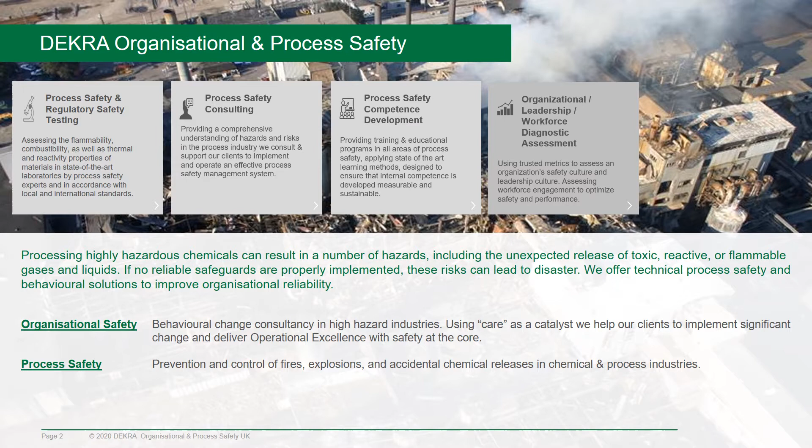In our work, we do a lot of process safety and regulatory safety testing, process safety consulting across a whole range of topics that make up process safety. We offer competence development training schemes for our clients to help educate and upskill in all the areas of process safety. And we do organisational leadership and workforce diagnostic assessments to look at the culture of organisations, their leaderships and their engagement of their workforce to help them plan a strategy to improve reliability in the human domain.

Finally, we do psychological and cognitive consultancy, drawing on insights from neuroscience. We use a brain-centric tool to help us reduce risk.

So in the course of the presentation, we'll talk about process safety information, the background to the process. Then we'll look at the process safety risks, but we'll focus on the runaway reaction risk. And within assessing runaway reactions, we'll look at systematic assessment procedures, what they should look like and why you should have one. Then specific to the case study, we'll look at thermodynamics and thermal stability, how we identify and assess potentially hazardous scenarios, and then how we rigorously evaluate those scenarios using layers of protection analysis to prove the validity of the safety case. We conclude with some relief system considerations for what is a rather demanding runaway reaction, and then we'll seek to summarise all of these things together.

We'll start out looking at the background to the process.

The process involves the epoxidation of vegetable oil via the Prileschajew reaction, where peroxyformic acid reacts with the unsaturated double bonds in the vegetable oil to form the epoxy group. This is a very long established process and also very widely used.

The process conditions involve mixing oil, solvent and hydrogen peroxide at 65 degrees, adding formic acid in a semi-batch manner over 120 minutes, and as you'll see from the reaction mechanism, the performic acid reacts with a double bond, liberating the epoxy group, but also rejuvenating and regenerating the formic acid. So the process involves the addition of further hydrogen peroxide, reacting out for a further 5 hours, and then quenching the batch. The regulators in the UK challenged the safety of the process after more than 50 years of processing on site.

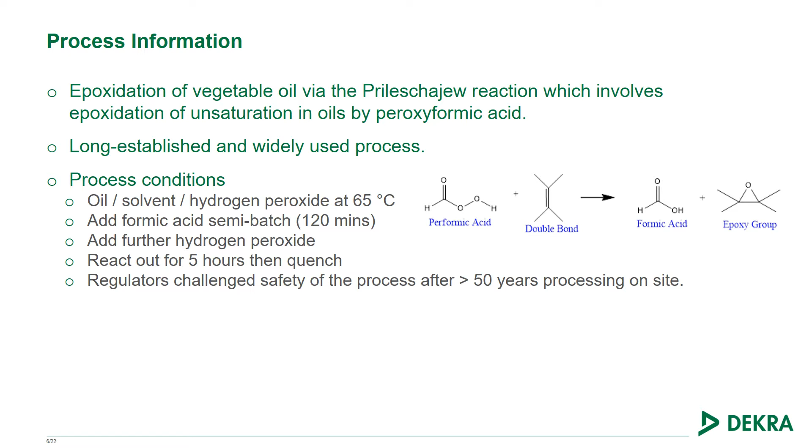There are a number of key learning points through the process. The first one being that a history of incident-free operation over a number of years isn't a guarantee of an incident-free future. In process safety, we're looking at events which are extremely low probability, but can be extremely high consequence. So we should strive for a culture based on a chronic sense of unease.

The second key learning point is that operating companies must be confident that their process safety studies are able to withstand scrutiny, either through the provision of internal competence, using external specialists, or a combination of both. Processes should be regularly reviewed against current standards and best practices to ensure that the safety case is current and up to date.

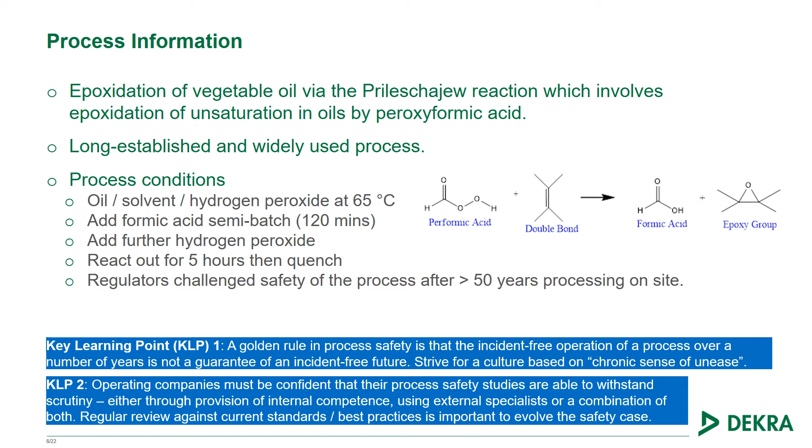Next, we'll look at the process safety risks involved in the process.

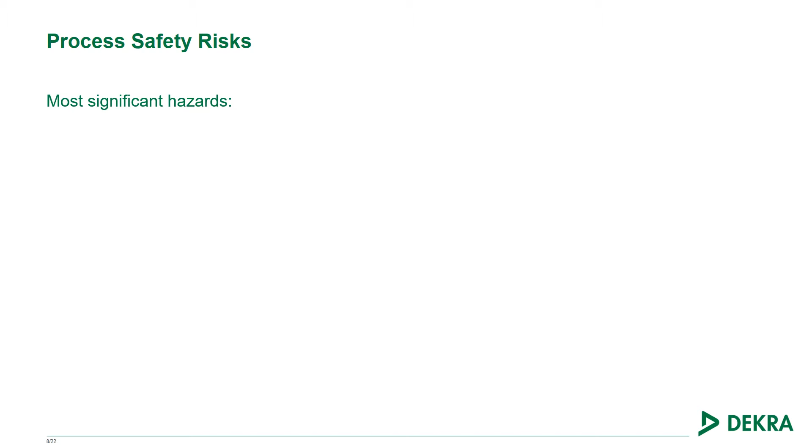So there are a number of significant risks posed in this particular process. The first one, and the one that the operating company in this case had focused on most of their attention over the 50 years, was the potential for detonation.

Hydrogen peroxide, formic acid and water mixtures can be detonable. The triangle diagram in the top right hand of the screen shows the region of instability or detonability of the hydrogen peroxide and formic acid mixtures. The wiggly blue line that's been superimposed demonstrates the process composition throughout the process, which has been specially designed to stay out of the detonable region indicated by the red line and the highly hazardous region indicated by the orange line.

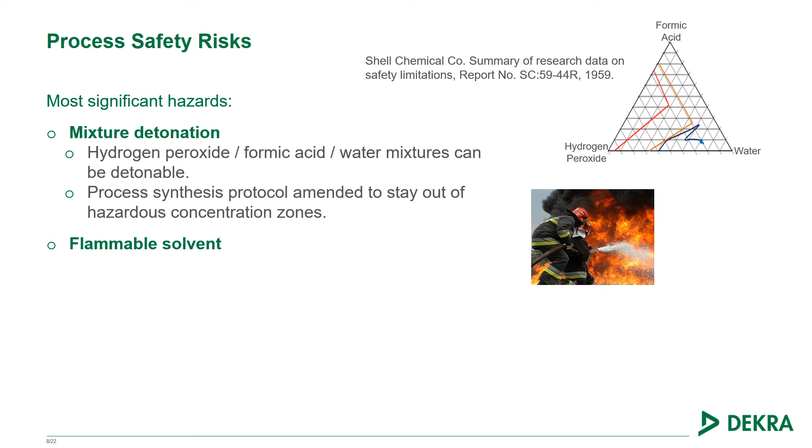There is, of course, always a flammable solvent risk with such operations. And there's also a risk of oil oxidation, sometimes called oily rag syndrome, where finely divided oil, either soaked into lagging or on cloths, can almost spontaneously combust. And vegetable oils are particularly renowned for that type of behaviour.

The final risk, and the thing that we're going to focus our efforts on, is the risk of runaway reaction.

The next key learning point in the case study is that you must have a safe system of work in place to protect against all foreseeable risks. You can't focus on the main risk and ignore the others.

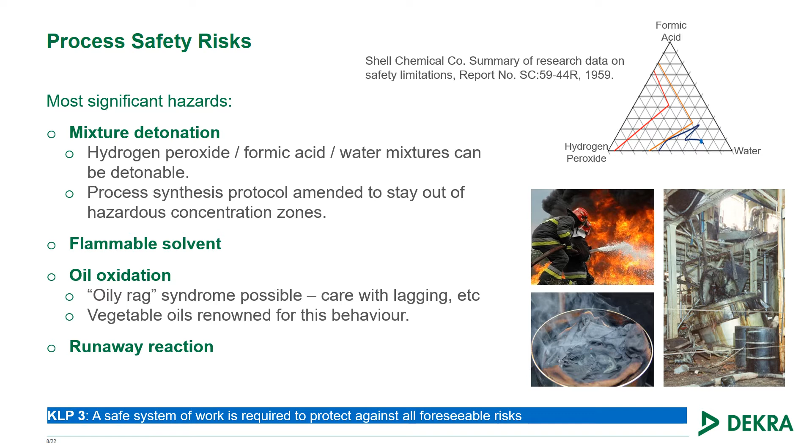So now we'll look deeper at the runaway reaction risks and go through the systematic assessment procedure, look at the kinetics, thermodynamics and thermal stability of the process, look at assessing hazardous scenarios, and then rigorously evaluate those, and then consider the relief system.

So having a systematic assessment procedure ingrained in process development is a really pivotal safeguard against exothermic runaway reactions. And this assessment procedure starts before any synthesis. It starts at the chemical route selection stage, where the selection of the chemical route can be governed to some extent by the process safety risks that the synthesis may involve.

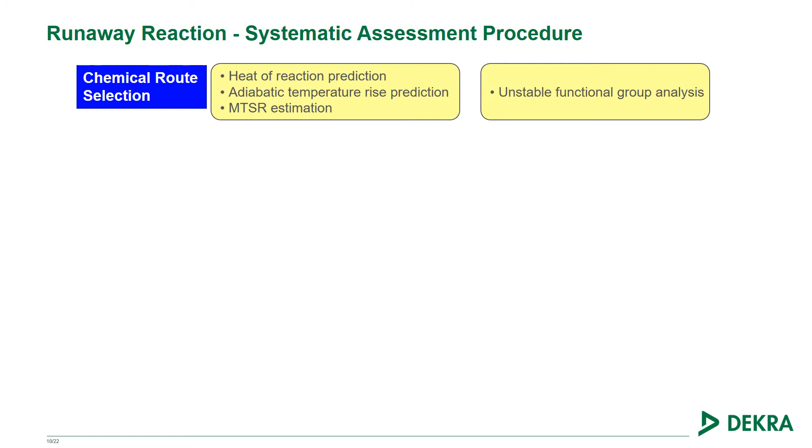At this stage, we'll be looking at things like predicting the heat of reaction, and if we can get that, predicting what the adiabatic temperature rise is, and then predicting what the maximum temperature of the synthesis reaction might be. We'd also look, in terms of thermal stability here, for potentially unstable functional groups.

When we do get into process development and optimization, hopefully of a route that's been selected with a balance of good process safety characteristics, we'll be looking to fully characterize the normal process. That's measure the heat of reaction through calorimetry, quantify any gas generation, and be able to measure and calculate the adiabatic temperature rise.

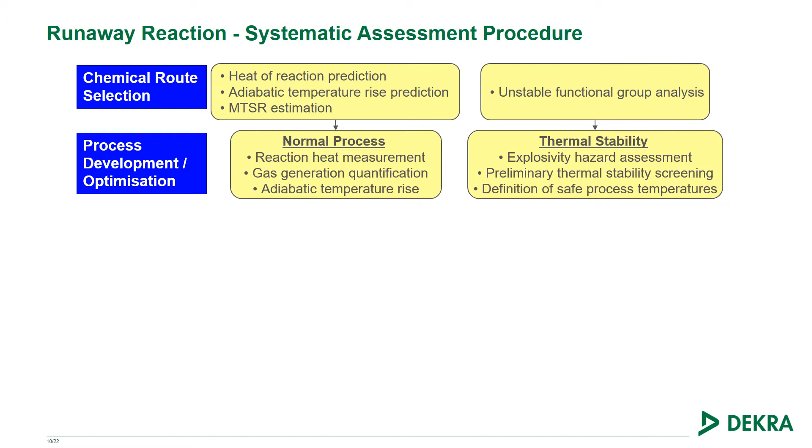In terms of thermal stability, we'll look at explosivity risk assessment if there are very unstable functional groups present, look at preliminary thermal stability screening, and then hopefully be able to do further testing to define maximum safe process temperatures.

Once we get to pilot scale, and then again at production scale, we need a basis of safety to exist. This will involve a process of identifying what hazardous deviations can exist, then simulating those deviations or modeling those deviations to understand the consequence, and then putting in place safety measures to either prevent the hazardous deviation from occurring or to protect against the consequences of that deviation.

This process is shown twice here, once for pilot scale and once for large scale. And that's very intentional because the risks at each scale are different. Pilot scale operations use different plant, different control philosophy, different extent of manual intervention than large scale plant. So it's very important that you do this process twice.

The key learning point here really is that the systematic assessment process should be ingrained in process development and should start before any synthesis begins. For retrospective process assessments, making sure that you fill in any gaps with missing characterization data will optimize the effectiveness of decisions made when considering consequences in the subsequent process hazard analysis.

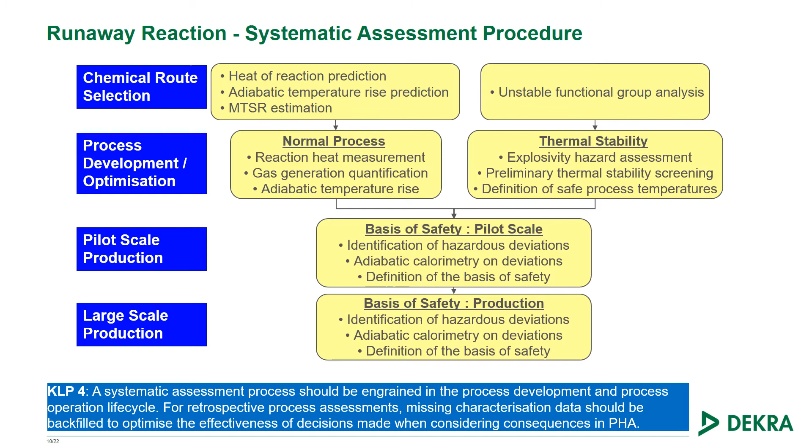In the first stage of reaction hazard assessment here, we're looking to characterize the overall thermochemistry of the process, and there are lots of potential energetic reactions which can occur. The desired epoxidation has a heat of reaction of between -230 and -250 kilojoules per mole.

There's gas generation in the second stage, there is significant accumulation of reactants, and the potential adiabatic temperature rise of the process is 330 Kelvin.

The worst case composition in terms of runaway reaction potential occurs after the second hydrogen peroxide addition, where 51% of the reaction takes place after the peroxide addition is completed.

There are also other energetic reactions possible. The decomposition of hydrogen peroxide has a heat of reaction of -98 kilojoules per mole, and the decomposition of performic acid has a heat of reaction of -352 kilojoules per mole.

The graph on the right-hand side shows the METTLER-TOLEDO RC1E simulation of the normal process, the dark blue line indicating the heat flow, and you can see very clearly two peaks. The first associated with the first stage of reaction during the formic acid addition, and then a second spike after the addition of the second portion of hydrogen peroxide.

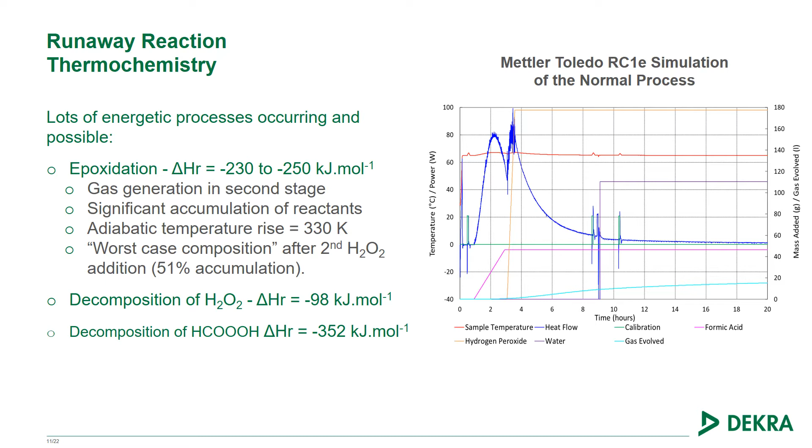It's the accumulation after that second hydrogen peroxide addition that is most interesting for us in terms of runaway reaction potential. The very light blue line at the bottom of the graph demonstrates the gas generation from the process. You'll see from the tail of the heat flow, also corroborated by the gas flow information, that the desired reaction takes 5 to 6 hours to reach a high degree of completion after the second peroxide addition.

The key learning point here is more in terms of chemical engineering. While chemists focus on thermodynamics, engineers tend to focus on kinetics, because it's kinetics which drive vent size. Regulators increasingly seek not just thermodynamic information, but also kinetic information when inspecting multi-product plant, to ensure that worst-case reactions are known. Just comparing heats of reaction provides a basis for hazard analysis, but not for risk assessment.

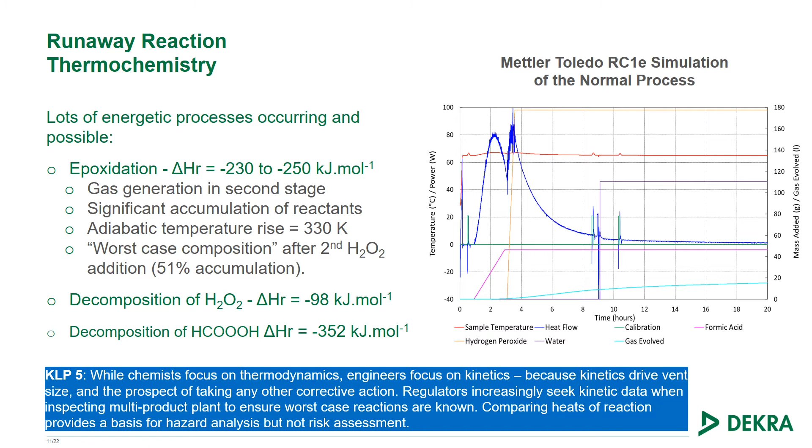The next step of chemical reaction hazard evaluation is to understand the thermal stability of the batch. So you'll see here a thermal stability test using accelerating rate calorimetry, an adiabatic calorimetry technique, and a sample of the batch after full completion of the reaction.

You'll see the classical heat wait search analysis of the ARC technique, indicating nothing occurring up to about 270 degrees, and then a slow initial but accelerating very rapidly exothermic decomposition with considerable pressure generation.

Correcting for phi-factor effects, the TD24, or the temperature from which it takes 24 hours from onset to reach maximum rate, is calculated to be 238 degrees C.

Key learning point here is that isothermal calorimetry measurements only tell us half the thermal story necessary to understand the safety of the process. Understanding the thermal stability is an absolutely essential ingredient in understanding the overall risk.

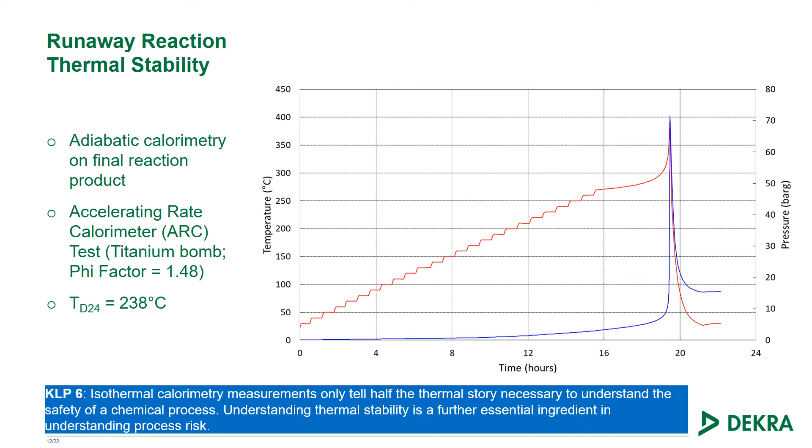Once we've characterized the process in terms of reaction calorimetry and thermochemistry understanding and thermal stability analysis, it's necessary to look at the plant together with the process to identify potentially hazardous scenarios.

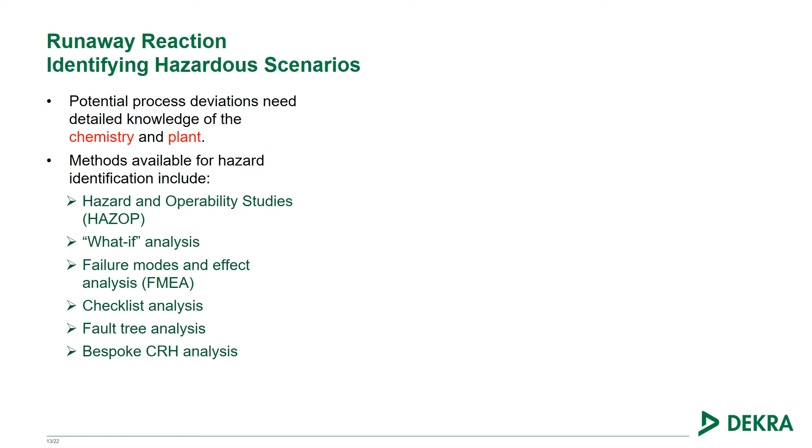There are a number of methods which can be applied to do this hazard analysis. We could use conventional hazard and operability studies, what-if analysis, failure mode and effect analysis, a simple checklist, fault tree analysis, or some other bespoke chemical reaction hazard analysis.

For the process involved in the epoxidation, there were 9 significant deviation scenarios identified. The first one being the least complex, the most foreseeable, which was cooling failure at the end of the second peroxide addition. After that, 8 other scenarios were also identified which could lead to runaway reaction.

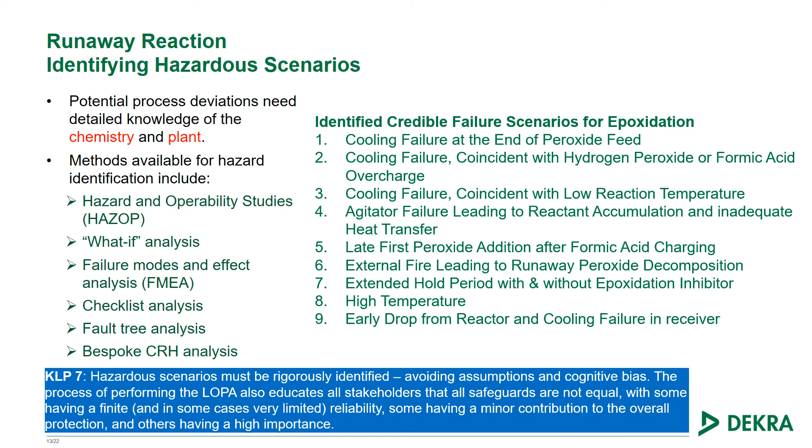These hazardous scenarios have to be identified rigorously, avoiding assumptions and cognitive bias. The process of performing a subsequent layer of protection analysis on each of these potential deviations provides a good basis to educate the stakeholders that all safeguards are not equal, some having a very finite and in some cases very limited reliability, some having a minor contribution to the overall protection, but others having a very high importance.

Having identified potentially hazardous scenarios, it's necessary to simulate and quantify those scenarios. In this case, we've looked at the adiabatic simulation of the loss of cooling scenario at 51% accumulation of peroxide.

This test was conducted using a VSP2 adiabatic calorimeter in a passivated Hastelloy C cell with a phi-factor of 1.1. You can see in a small matter of minutes the reaction progresses, and just over 100 degrees it accelerates extremely rapidly, generating very high pressures, in this case well in excess of 70 bar.

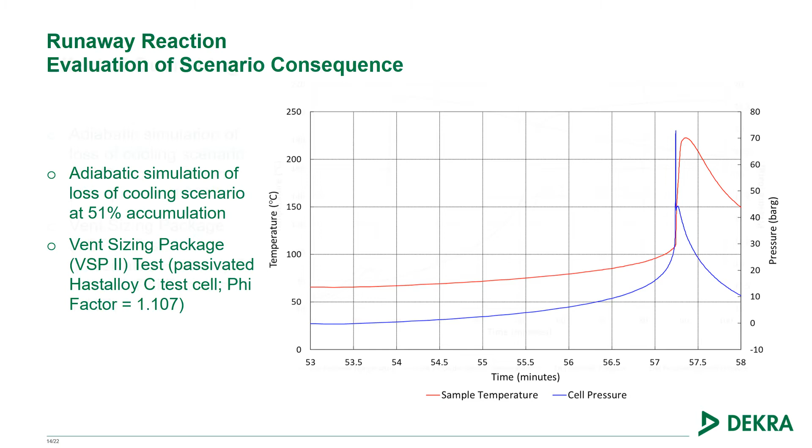One other protection mechanism that existed on the plant was a water quench. In the laboratory, we can use our adiabatic calorimetry techniques to look at the effectiveness of the water quench, and you can see in this graph a side-by-side comparison of the temperature and pressure profiles when the water quench is added.

This is for the 51% accumulation scenario when the temperature reaches 90 degrees. The red lines represent the unquenched reactions, the blue lines represent the quenched reactions, and you can see the downturn at about 90 degrees as the water is injected.

What you will also see is that the water injection does not kill the reaction. The reaction continues. The peak temperature is slightly moderated, the peak pressure is slightly moderated, and the rates are slightly moderated, but a runaway reaction still continues to well above the design pressure of the plant.

The key learning point from this stage of work is that the physical water quench doesn't stop the reaction. The reaction continues, but at a lower rate. So this buys us time and leads to lower peak conditions, but possibly still hazardous. So the summary is: safeguards don't just need to operate, they must be fully effective in removing the hazard.

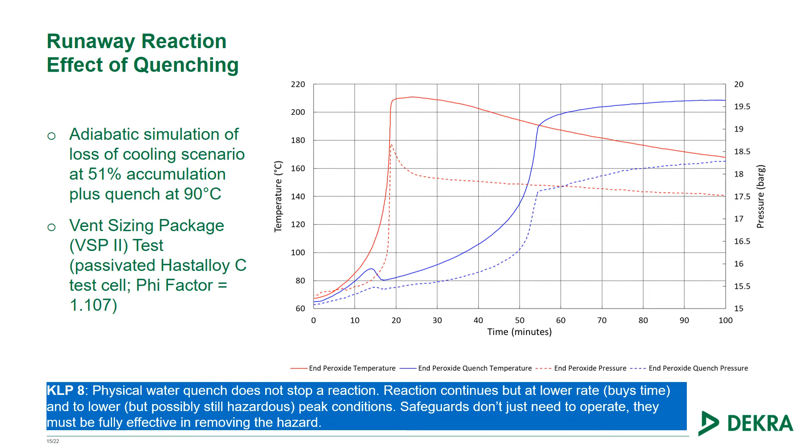Without wishing to dwell on the detail, I wanted to show you an example of what a layer of protection analysis looks like for scenario 1. Scenario 1 is failure of the cooling water supply at a point in the process immediately after the second hydrogen peroxide charge, leading to runaway reaction, overpressurization, vessel rupture, and in all likelihood resulting in the fatality of the 2 operators who supervise the plant. Firstly, we look at the initiating causes and their likelihood.

The potential causes here were cooling pump failure, electrical failure, control failure closing the cooling supply, agitator failure, or cooling water pipe rupture. Overall, the likelihood is about 1 per 4 years that this event would occur.

Then we move on to look at the protection layers in place. Firstly, we have general process design. The process is not in this at-risk state all the time over the course of a year, but for 1750 batches per year with a risk period of 2 hours per batch, we can see that about 40% of the time we are at risk.

We also have a SIL compliant quench system for which we can take credit. We have really good evacuation procedures in the event of an emergency. And if we have an adequately sized relief system, we can take account of a reduction factor of 100 in the likelihood. The conclusion for this study is that the risk is as low as reasonably practicable if the relief system is shown to be effective.

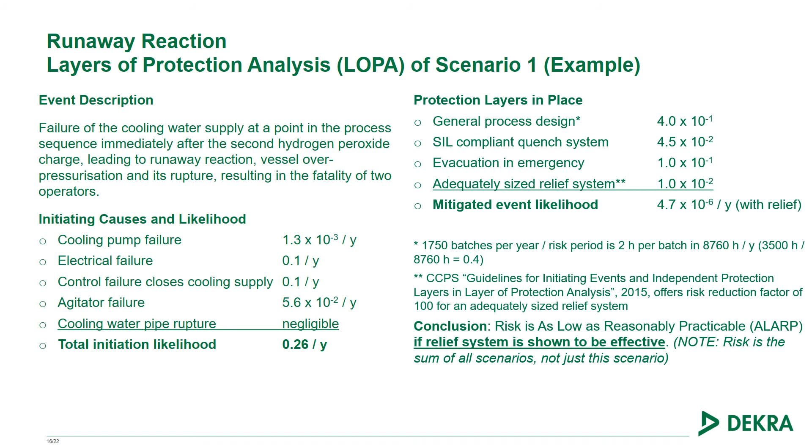The risk is the sum of all the scenarios, not just this scenario. The key learning points here are firstly, that just because a vessel has a vent doesn't mean it's big enough. And secondly, even if you have a vent, you're now only recommended to take a risk reduction factor of 100 if it's adequately sized.

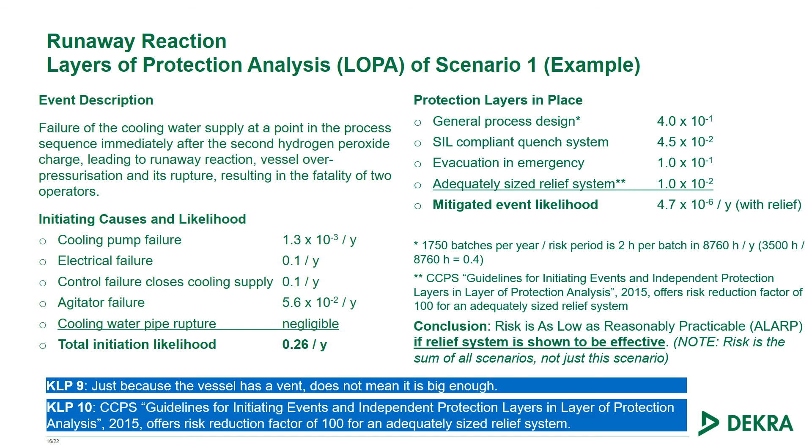Emergency relief systems are very commonly the ultimate basis of safety for many reactors involving exothermic reactions. But there are some considerations that need to be taken into account to make sure that the relief is doing and will do its desired function.

Firstly, the relief system for a runaway reaction has to be based on DIERS methodologies for two-phase discharge. DIERS is the Design Institute for Emergency Relief Systems.

In the current case, the quench is a very necessary layer of protection to meet the tolerability criteria. As we've seen earlier in the case study, the quench does not stop the reaction, but it does slow the reaction down, and slowing the kinetics provides a realistic way of reducing the size of the emergency relief device that's required. But still, having a 0.5 meter diameter vent, the thrust forces seen on the pipework by the two-phase flow are huge, and you must have adequate support and bracing in this pipework to ensure its integrity.

Finally, the discharge normally has to be captured in a suitable separation device, like a dump tank. That also needs adequate design for separation. In the current case, because of the diameter of the pipe, bends in the pipework could not be supported due to the extreme thrust forces, so the pipe had to direct directly and straight into a dump tank.

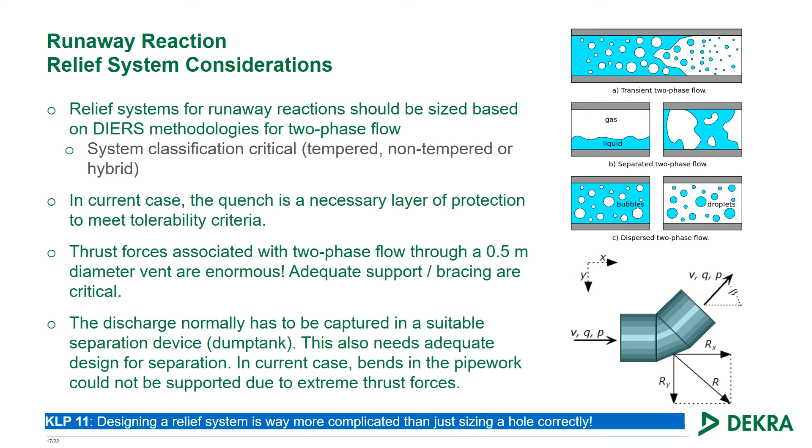Final learning point in the case study, therefore, is that designing a relief system is way more complicated than just sizing a hole correctly.

Now we come to the summary. The idea of this case study was to look at the end-to-end way that we safeguard plants and people against the effects of runaway reaction.

We've pulled out a number of key learning points throughout the case study, and we'll go through them here one at a time. Hopefully these will be useful for you. They were certainly useful for the operator.

The first key learning point was that an incident-free operation in the past is not a guarantee of an incident-free future. Secondly, process safety studies must be current and able to withstand scrutiny. In terms of current, that means being refreshed regularly to reflect current best practices.

Third point is that a safe system of work is required to protect against all foreseeable risks. You can't just focus on the highest risk and protect against that and ignore the others.

Fourth, a systematic assessment process for reaction hazards should exist. That systematic process will give rigor to your attempts to protect your plant and people against runaway reactions. Any gaps when you're doing a retrospective assessment should be filled.

The fifth point was that kinetics drive vent size. Heats of reaction are not a good way to compare reactions in terms of vent requirement.

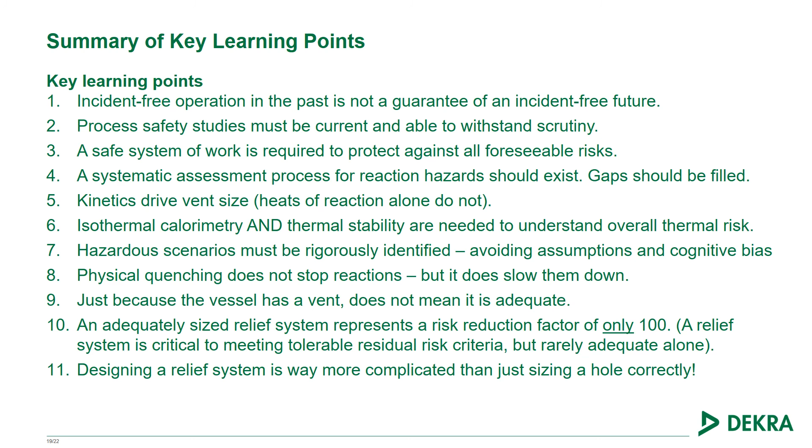So in conclusion, there are a number of steps that we have to go through in assessing the safety of a chemical process. We have to understand the thermochemical properties of the reaction, that's thermal stability and reaction calorimetry. We need a robust method for looking at process hazard analysis, looking for potential worst case scenarios. Then we need to look at the consequences of those scenarios and then ensure that we have safeguards in place.

And in this case, we had a quench of which we've proven the efficacy, and that was a SIL compliant quench system. And we have a relief system, and we've looked at the sizing, the mechanical strength of the line, and separation of the discharged material into a containment vessel.

And then we've got to demonstrate that our residual risk is acceptable against our own risk criteria, and we've demonstrated the use of LOPA in this study to do that.

So in assuring the safety of an exothermic reaction involves many interrelated and multidisciplinary steps. A failure or an error in any of those steps can compromise the overall safety of the process.

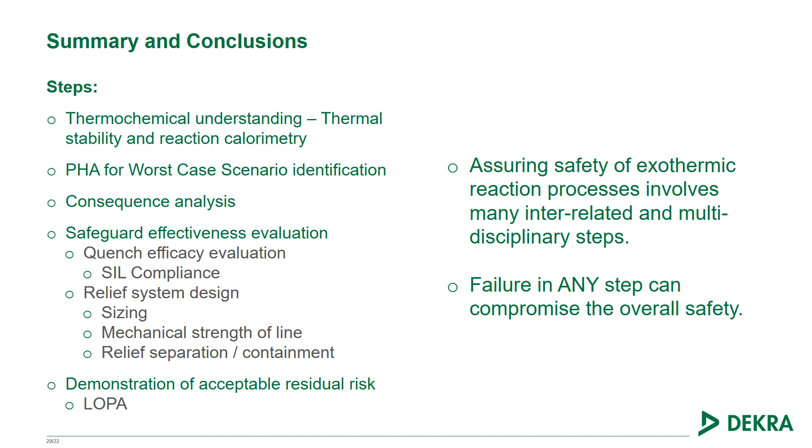A final reflection on the case study is that we've demonstrated here that even very hazardous reactions can be operated safely, but the process of assuring safety for these processes can be, and usually is, very demanding.

A better way is to develop inherently safer processes, to operate nearer the top of the hierarchy of controls. And this is where chemists come to the fore. Chemists build in risk to the processes by virtue of the synthetic routes that they choose and the raw materials that are involved. Engineers then have to control those risks. So process safety awareness for chemists is pivotal to empower them to make more informed decisions in development.